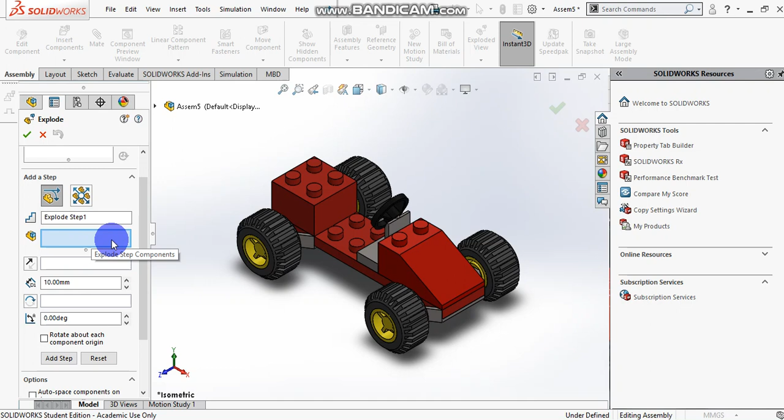Okay, when you click exploded view, you choose what component you're going to remove. First, you can press the Control key so you're able to select more than one component. You will see it shows axis here, indicating which direction you can remove your component. In this case, I will select these 4 components, then pull it outward.

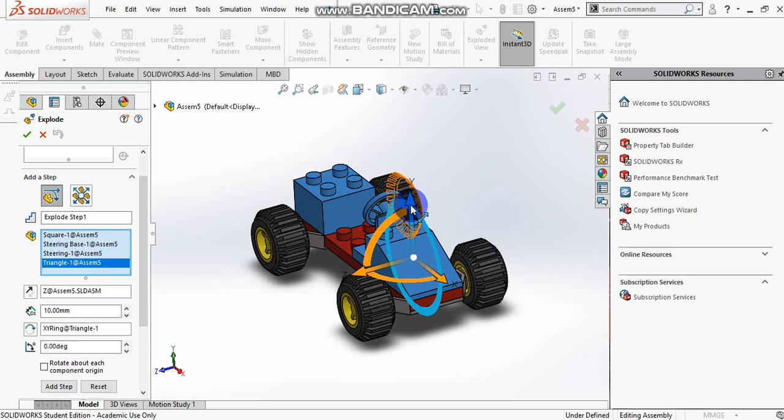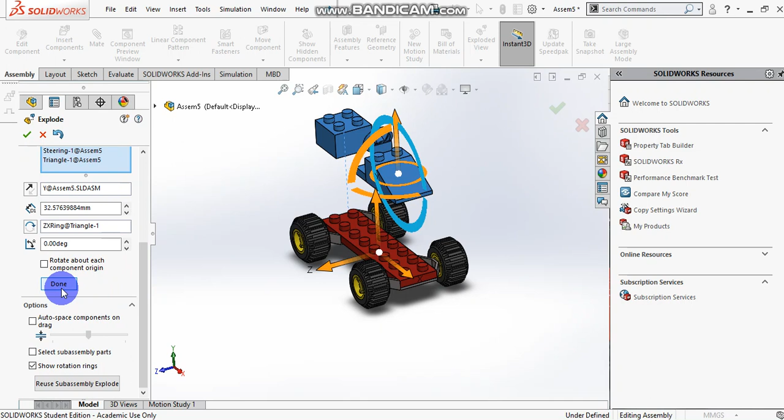Even more. So for the distance here, you just need to determine it by yourself. Can you see the part here? Need to click done. After you click done, it will show you have exploded step 1. In step 1, I removed these 4 components.

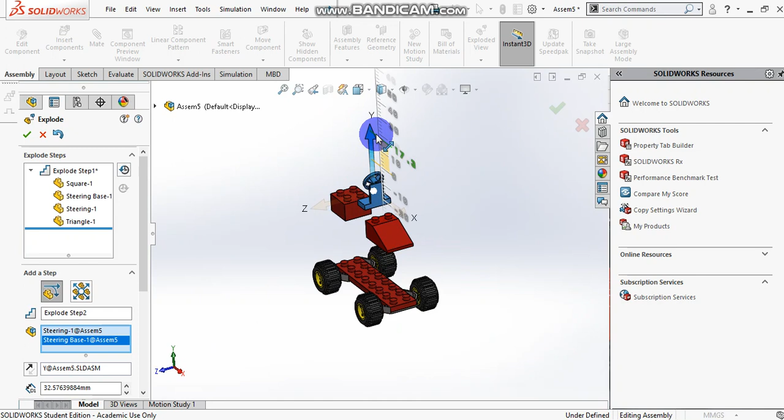So for step 2, I select these 2 components and further remove this component. This is my step 2, and you will see it appear here as step 2. Then I click done, and when you click done and add a step, it becomes exploded step 3.

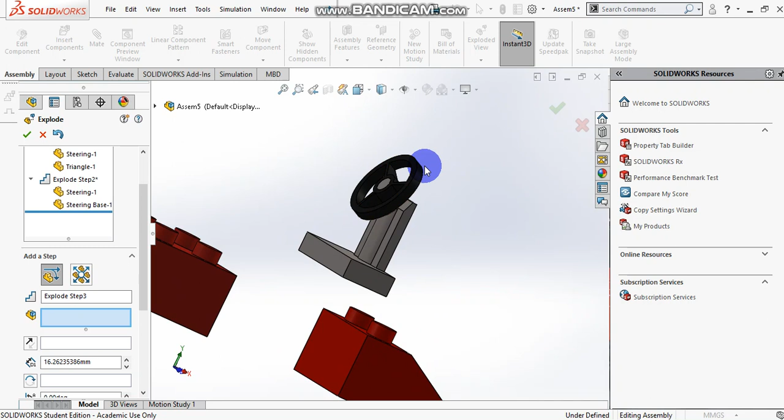So for step 3, I will show how we remove this steering wheel. Select this steering wheel. The direction that you select must be perpendicular with the shaft here.

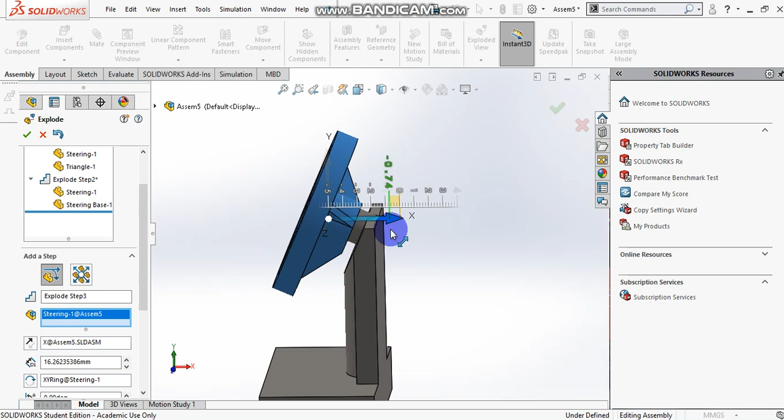You can see here, if you move in the X direction, you will see what happens — it overlaps with the part. So in this case, it's not logical, so I will delete this step 3.

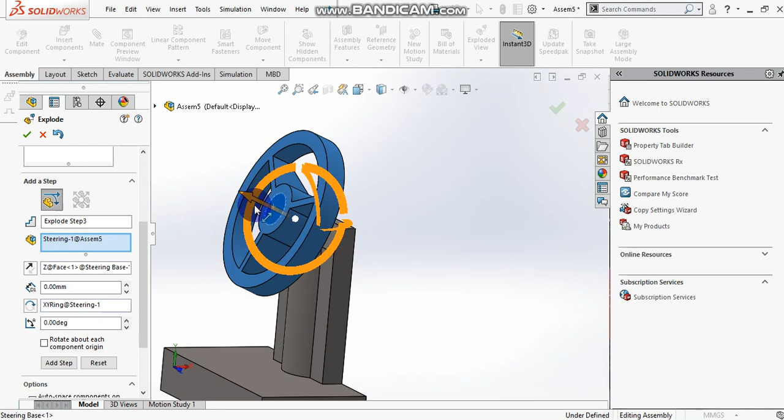So how are we going to create step 3? From here, can you see this one? This is to determine the perpendicular direction. So I will click this and select this face here. The arrow will be perpendicular to this face. So the arrow that I move — you can see this is the correct way to remove the steering wheel. Then I will press done.

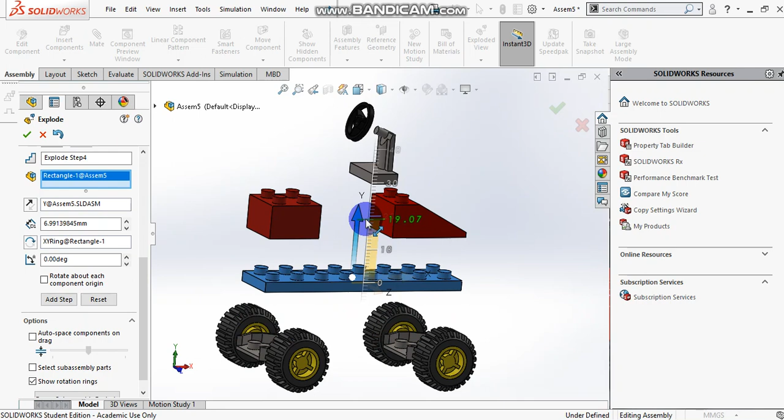So next step, I will remove the base here. Remember to press done — don't press confirm. If you accidentally press confirm before you complete this, you will find it hangs somewhere.

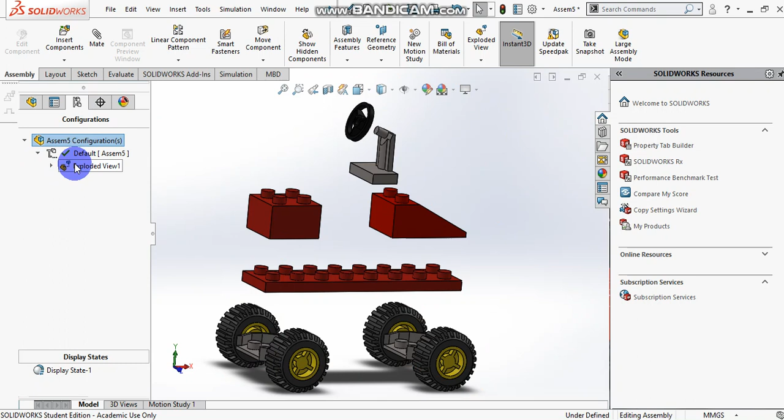You can go to Configuration Manager, and under here you will expand it. You will see you have Exploded View 1. From here you can edit features, so you can continue your exploded view.

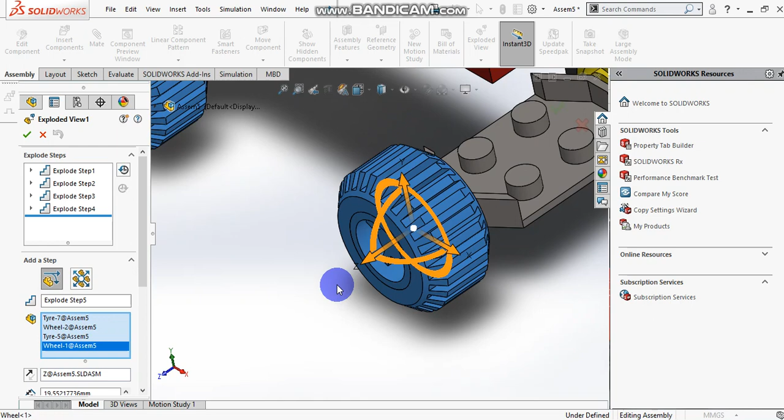From here I will remove the wheel together with the tires. Remember to press the Control key on the keyboard so you can remove multiple components. Then remember to press done.

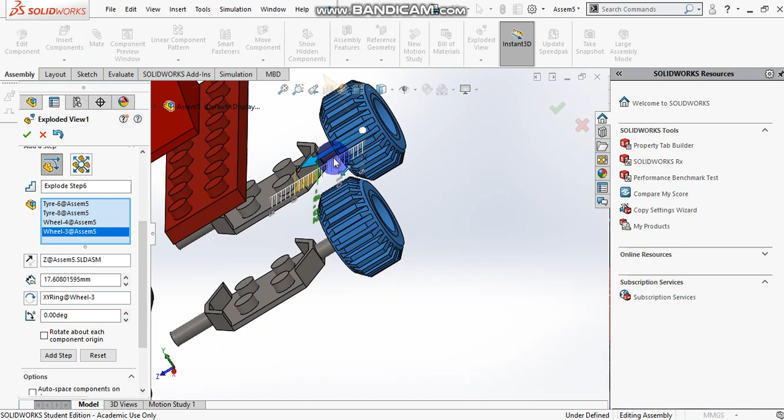This part here, select the tire, select the wheel, and then I will remove it. Done. So next step, remove the wheel, remove the tire. Done.

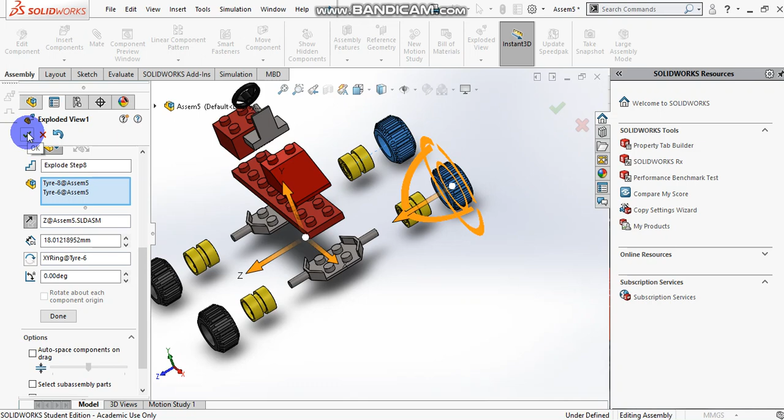Now your exploded view is complete. This is your exploded view.

You can run the exploded animation. You can go here — Animate Collapse. Collapse means the assembly animation, you will see.

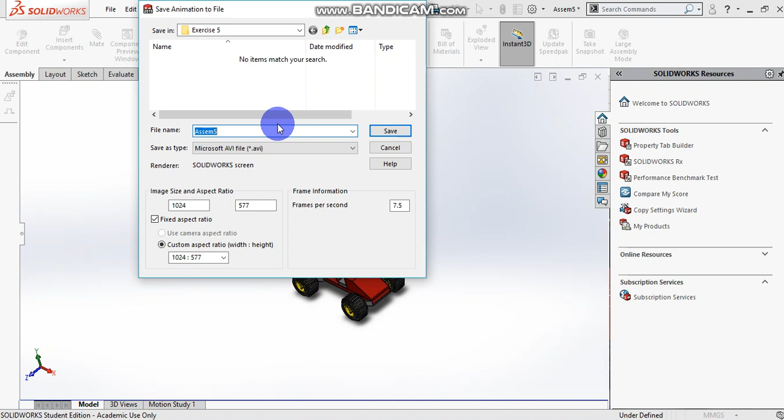When you click exploded view, under here, when you run the animation, it will bring up the animation controller. From here, you can save your animation for exploded or collapse view in an AVI file. You can save the format here into video format. Then you can show the exploded view, collapse view, and animate it.

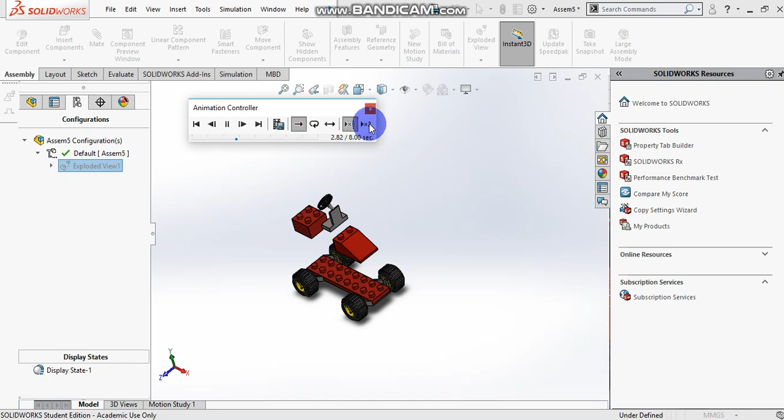Then you can show the animation for collapse. So this is how you create the exploded view.